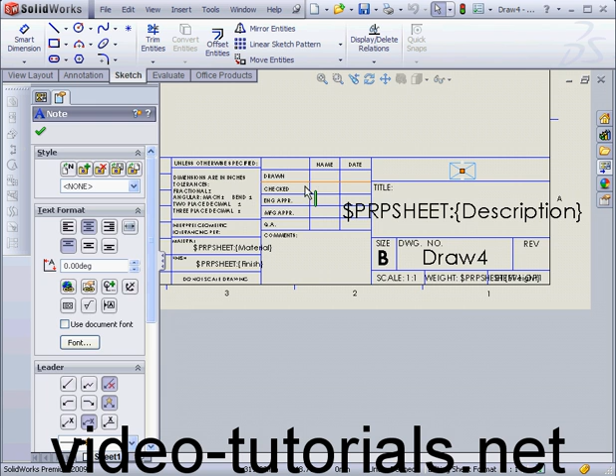Okay, let's go to File on the main menu, Properties, choose the Custom tab, and from the Property Name drop-down window, let's select Company Name. The type we'll leave as text, and we'll enter a value here. Let's enter the company name, VTN, and click OK.

Now as you can see, the company name field is populated in our title block. By the way, if you see a bunch of error messages here, go to the View command and uncheck Annotation Link Errors.

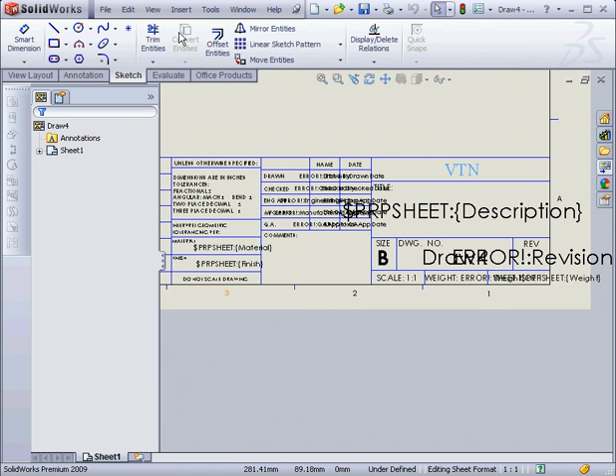Here's what I'm talking about. There's a bunch of gobbledygook here. Let's go to View and uncheck Annotation Link Errors.

Okay, let's look at the number of sheets field. I'm going to grab this note and move it up so that I can see the number of sheets field a little better.

Okay, if I right-click and select Edit Text in Window, we see that the note is linked to two properties. There's the current sheet, and the second property is the number of total sheets. Let's cancel out of this for now.

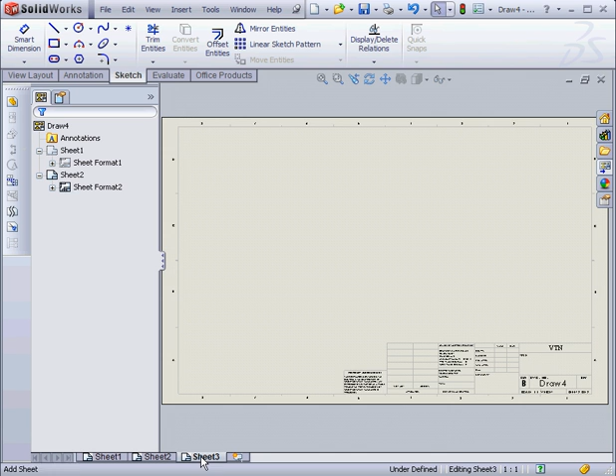Now let's insert a couple more sheets. As you see when I zoom in, the sheet displays 3 of 3, so the info in our note did update. When I mouse over the sheet tabs, I see previews of those sheets.

Let's right-click and delete. Yes. And the info in our note is also updated. Incidentally, the second sheet also shows the company name, as well as the first sheet.

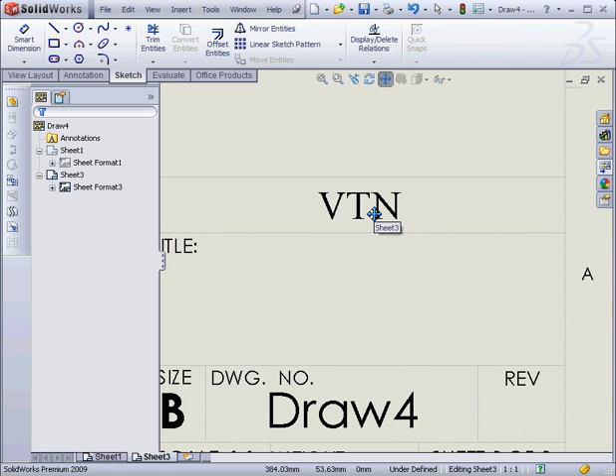Let's take a look at the scale note now. Right-click on it and select Edit Text in Window. Oops, got the wrong note. Let's try that again. Right-click on the scale note, Edit Text in Window. Here we see that this note is linked to the sheet scale property. Let's cancel out for now.

Now if I right-click and select Properties, let's modify the scale. We'll change it, for example, to 2:1. Let's click OK. As you see, the scale changes here as well. Let's revert back to 1:1.

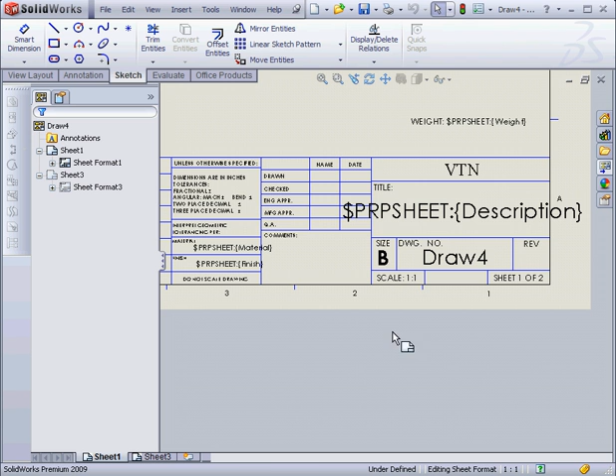Click OK. And the last note, Description. Let's right-click on it, Edit Text in Window. As you can see, this field is linked to the Description property. Let's cancel out for now.

And let's go open a part. B14-A. Oops, got the wrong part. All right, let's try that again. B14-A.

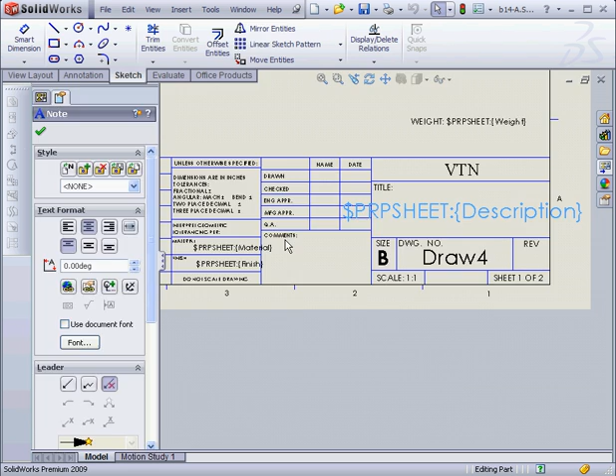Now when this part is opened, let's go to Properties. We'll choose Description from the Custom tab. Text. Let's enter a description. Our value will be 'My Part'. Click OK. And back to our drawing document.

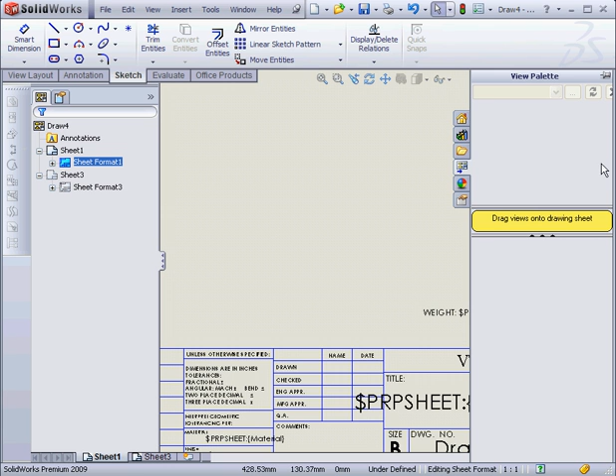I simply bring in something. Let's open the View palette. There's nothing here right now. First, select Edit Sheet, and now the model is available. Let's drag out the front view and click OK.

Now, under the title note is our description, My Part.

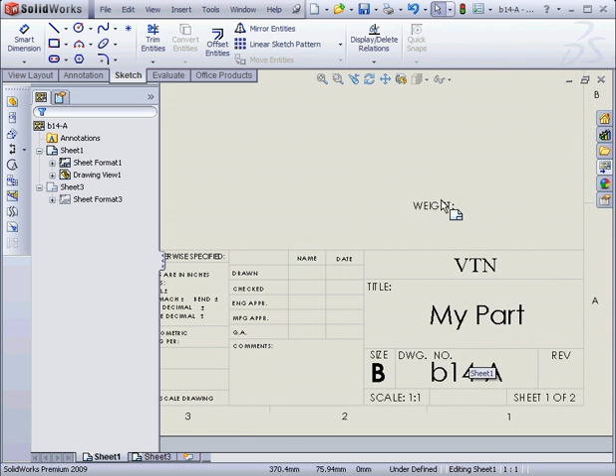Okay, let's edit the weight field next. We're going to go back to My Part. Now let's go to File, Properties. On the Custom tab, let's choose another property from the drop-down menu, Weight. It'll be text. We'll enter Mass and click OK.

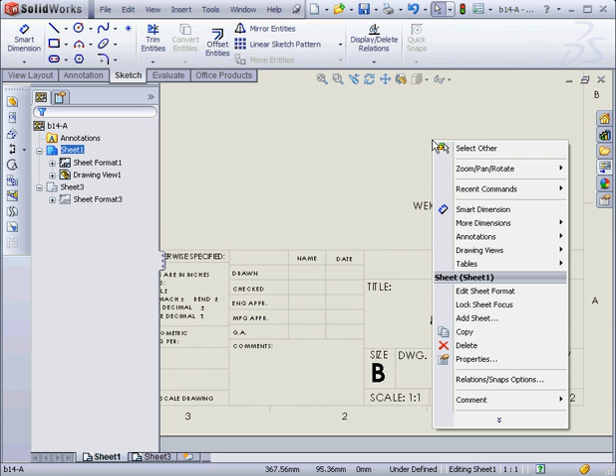Let's go back to our drawing document. As you can see, the weight is now displayed in our note. Right-click, Edit Sheet Format. And now I'm able to grab this note and drag it to its proper location.

This concludes our tutorial about editing the title block.